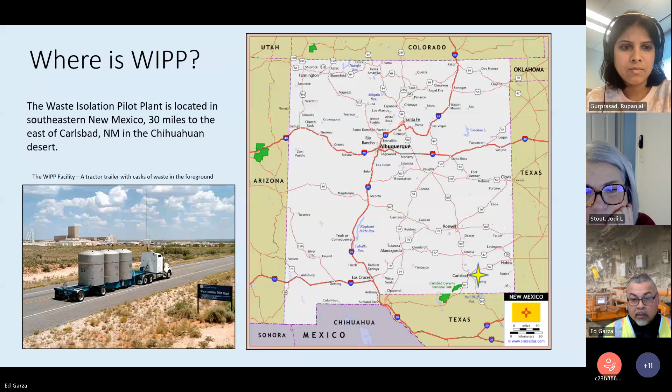So what is WIPP? That's the question we get quite often. We are the nation's deep geological repository for defense-related transuranic waste. The facility is owned by the Department of Energy and operated by a contractor that we contract to run the facility for us. We currently have started a new contract with a company called the Salado Isolation Mining Contractors, abbreviated SIMCO. You might hear me say the word SIMCO on occasion here as we're talking. Again, it's owned by the DOE but operated by a contractor for the DOE.

Transuranic waste, defense-related transuranic waste, is the byproduct of the production of our nuclear weapons cache in the United States. Many people don't know, but since 1945 and the Manhattan Project, the United States has built in the neighborhood of 32,000 nuclear warheads. And the complex required to do that is very large, dispersed throughout the United States.

In the process of making nuclear weapons, everything in the production process at some point has the opportunity to become contaminated with plutonium and uranium, which are radioactive components, radioactive isotopes. For that reason, if you make waste that has some element of plutonium or uranium, or any of its decay byproducts, you just can't put that into a regular landfill. So it has to go to a special repository that wouldn't risk contaminating the environment, and that's what WIPP is. We are that repository.

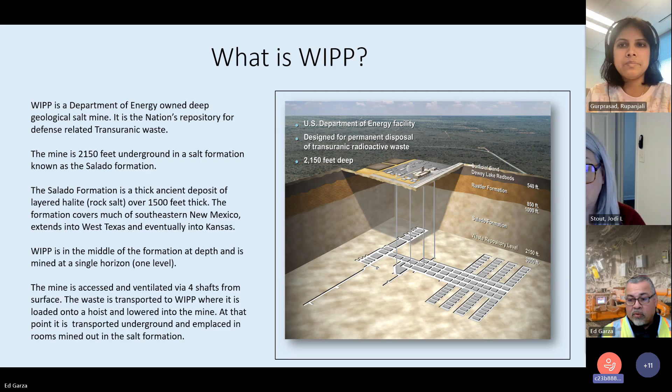Once we get it here, we take it underground. It goes into the different rooms, and then we just do it over and over again. In order to do this operation, we have to operate the mine. So I'll go to our next slide here.

One of the questions I often get about WIPP is, why would we do this operation in a salt mine? Why halite, or rock salt? Rock salt is known as halite in the mining community, and it has many favorable characteristics for this type of activity. Salt is essentially a plastic medium.

What that means is when you drill into salt, let's say I drill a hole into rock salt, the forces felt by that rock salt will cause the salt to flow into that hole. So if we put transuranic waste into a room mined into rock salt, that salt will over time slowly fill in that void space and encapsulate that waste for perpetuity. That's the reason we're doing an operation like this in a salt mine.

It was actually a study done by the National Academy of Sciences back in the early 50s to decide what we would do with this issue of transuranic waste.

So you see a picture there, an actual picture of rock salt. It's interesting — rock salt weighs about 135 pounds per cubic foot. A cubic foot is about this dimension, and that's going to weigh 135 pounds. So you can imagine there are tons and tons of this that we have to deal with when we're doing this operation.

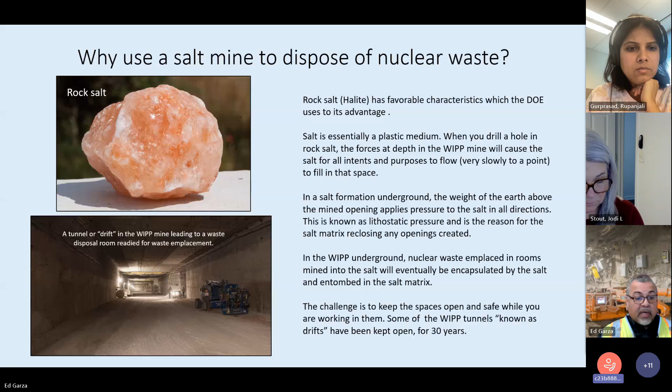The trick for us is that we have to allow that to occur in the rooms where we place the waste, but the drifts or access tunnels we use to get to those rooms, we have to keep open without them encapsulating us while we do that activity. So that is really our challenge. The WIPP facility has some openings, tunnels, which we call a drift, that have been kept open now for over 30 years, which is really a challenge in the mining world.

Every opening in the mine is continually experiencing forces from this lithostatic pressure. These forces act upon the bedded salt layers and can cause cracks and spalling on the rock exposed in the opening. Those rocks can come apart and fall into the opening, some of which are 25 feet tall. And as I said, rock salt weighs 135 pounds per cubic foot, so that obviously becomes a hazard to the workers in these drifts or tunnels doing this operation.

The force is equal to about 1 pound per square inch for every foot of earth above that opening. Since we're at 2,150 feet underground, the forces felt on all the openings at the WIPP site are equal to 2,150 pounds per square inch. So that is quite a bit of force.

If we don't mitigate that force trying to push the roof and walls inward, the rock could slough off, break apart, come down, and strike or even bury miners working in our underground. That could lead to accidents, serious injuries, or even fatalities.

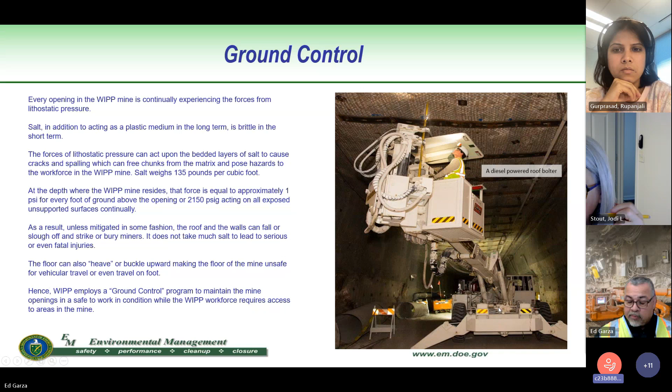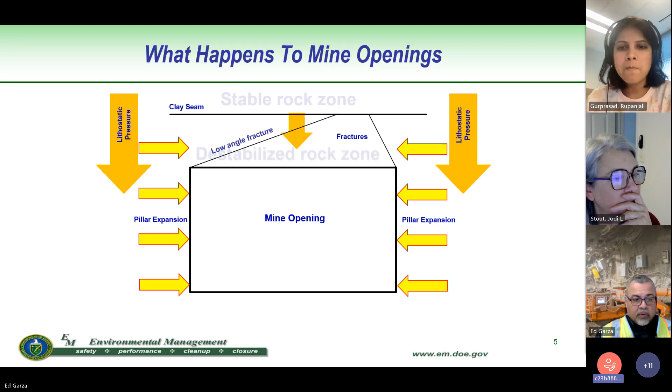Now, I'll talk to you a little bit about a phenomenon that we call low angle fracture. So in this graphic here, you can see that there are forces that when they are manifested on the opening, they're going to cause a phenomenon that's called low angle fracture.

Now, when I tour people in our mine, I ask them to take a guess about where the forces inside of this opening are manifested the most. Most of them will say in the middle of the roof. But actually, it's where the horizontal and the vertical of the roof and the walls meet. That's where the forces tend to manifest themselves the most.

And what will happen is you'll start to see microfractures that start to propagate from those corners, and then they will start moving upwards, or if they're coming from the bottom, they'll move downwards, and they will continue to move like that and coalesce into big, gigantic fractures. So eventually they're one fracture, and they'll propagate until something stops them.

Usually, in our mine, it's the clay seam layer that's above the opening in that destabilized rock zone, or they could actually run into each other and stop each other. But as you can see from the graphic, the result of that is that now there is a portion of that destabilized rock zone matrix which has been freed from the matrix, and it can fall into the underground. And this can be literally tons, even thousands of tons of material.

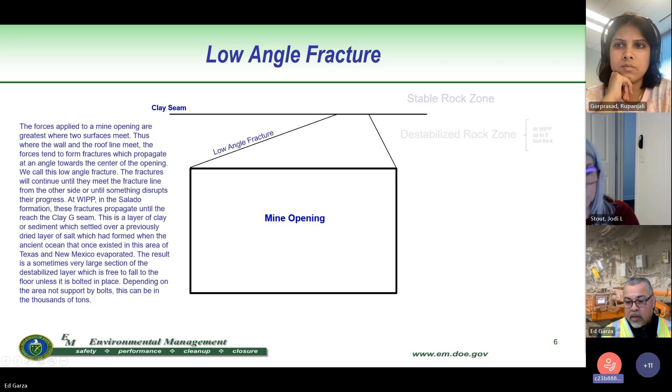We also use chain link mesh. Now, it's not the standard chain link you'd see dividing someone's yard from the street - this is very heavy-duty stuff that can hold up to 3,500 pounds per square foot.

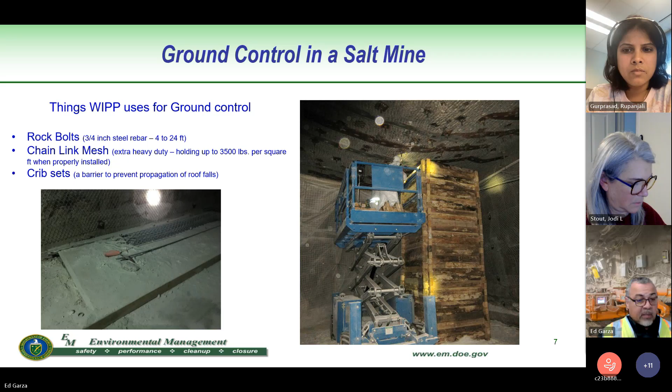Sometimes we also use things called crib sets. Crib sets are probably what you've traditionally seen in movies about mines - timbers stacked up from the floor of the opening all the way to the ceiling, just there to hold up the ceiling. It also has the added advantage of preventing roof falls that begin in the ceiling from propagating past where you put the crib set. So those are just some of the components we use for ground control.

Now, the main component we use is a rock bolt, and here's how it works. In this picture, you can see past that chain link mesh into the destabilized rock zone. This is an area that actually fell, and you can see the layers of salt that make up that destabilized rock zone - we call them laminates. In the middle of that buckled laminate, that roof you see there, you can actually see an old bolt that had at one time held that laminate together.

So that's what rock bolts do - we pin the laminations in the destabilized rock zone together by adding that bolt. Usually we use shorter bolts for that, called mechanical bolts, which make that destabilized rock layer stay together and be more coherent. However, sometimes we have to anchor the entire piece of halite freed by the low-angle fracture phenomenon, and we use longer bolts in that case. Those longer bolts go all the way through the destabilized rock zone into the stable rock zone - it's kind of like nailing drywall to a stud.

Now, like I said earlier, at the end of those bolts they're threaded. So we take a metal plate that has a hole in the center, put the bolt through that plate, then take a nut and torque it up against the plate and the ceiling - that's what pins that bolt onto the ceiling.

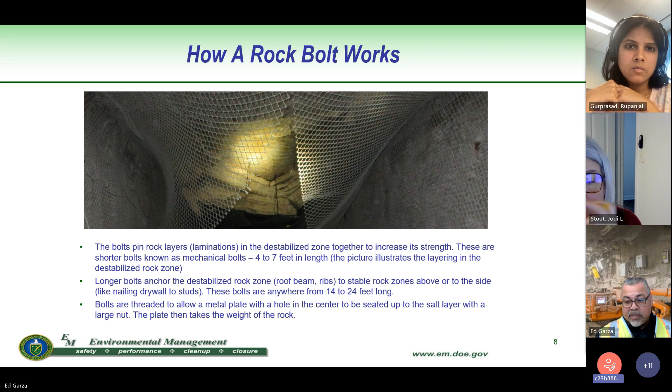I have a graphical representation that shows this a little better. Here you have the destabilized rock zone, and the stable rock zone above that. What we do is drill holes through the destabilized rock zone into the stable rock zone, about 20 feet deep. We push a resin packet up into that hole - it has two components, so it's not set yet, just little packets pushed up in there. Then we take the bolt, and the bolting machine pushes the bolt up into that same hole, piercing that resin packet. Then we spin it with the bolting machine, which mixes the two resins, and they set in about 30 seconds.

Now, basically, it becomes part of the stable rock zone matrix, and it's very strong. It will hold that bolt in that resin packet and an additional 65,000 pounds. After we have the bolt into the resin and the resin packet is set, then we'll take the plate, which has a hole in it, put it around the bolt, and the nut will push the plate up onto the ceiling. Now what we have done is we have captured the weight of that area of rock that has been freed, and it's being held by the resin packet and the bolt in the stable rock zone.

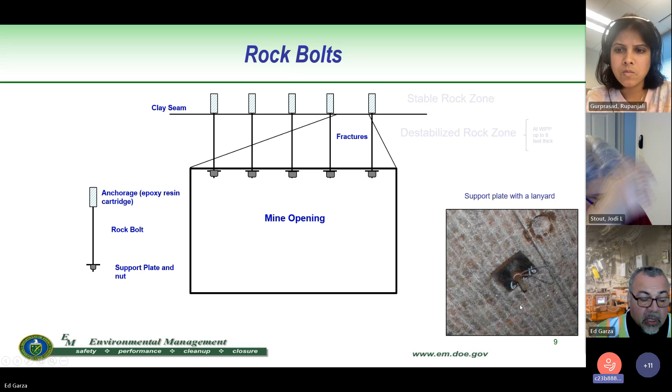So you see on the right-hand side of this graphic a picture showing one of the completed bolt assemblies. You can see the plate has been threaded up against the rock surface by the nut, and you can see the end of the bolt sticking out from the hole in the plate, and the portion threaded through by the nut. We also put a lanyard on that nut so that we can capture any bolts that break.

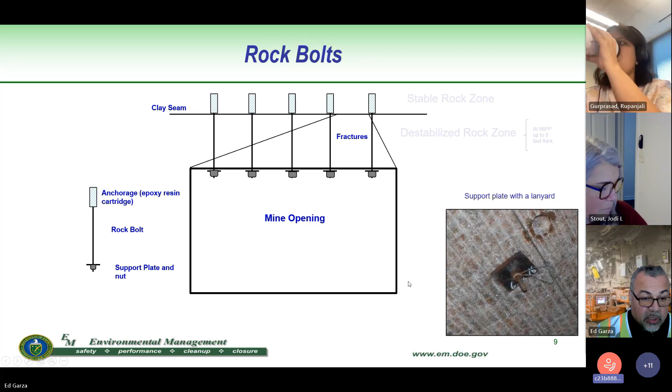Now we have a bunch of these bolts in our underground. This is the main rock support system that we use to prevent rocks from falling on us. The long bolts go through the destabilized rock zone, and they have the strength to hold up 65,000 pounds of weight. We only take credit for 45,000 pounds to give ourselves a little margin.

Now, the question I get often is, how do you know how many bolts to put in the rock in order to stabilize the freed rock from the low angle fracture phenomenon? Well, number one, we have a lot of experience. We've been doing this for 30 years now. In the picture you see there's obviously a pattern of bolts that we put in there. Over the years, we've learned that if we put 7 bolts in a room where we place waste all the way from one wall to the next, and then 5 feet later put another row of those bolts, that will be enough bolts to hold up any rock that destabilizes and wants to fall. This is something we've learned over the years.

But if you have a low angle fracture phenomenon occurring, you can drill up into that destabilized rock, and then put a scratching tool that will go up and find where the rock is separating from the matrix. Now you know how thick the rock is, and if you know the area being impacted that's starting to come down, which you can do with sounding tools or sonic tools, you'll be able to tell just how big an area of free rock you have. Since you know that halite weighs 135 pounds per cubic foot, now you know how much steel you need in order to hold up that piece of freed rock.

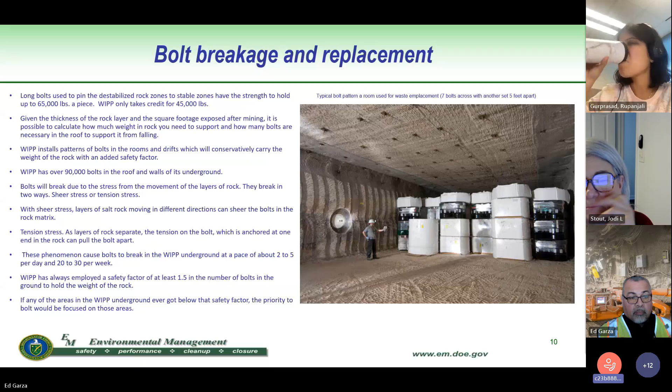Now, the bolts will fail, they will break from the forces they are feeling in the underground. There are two ways for our bolts to break. They can either be sheared by shear stress, caused by the laminate layers you saw in that picture earlier, moving against each other, sliding against each other. They'll actually slide enough that they will snap the bolt somewhere along its length, right in half, or along the length somewhere. That's why we have the lanyard, to capture the lower portion of the bolt that was broken by that shear. The rock can also move downward.

It can start to sag, and as it sags, it will actually move around the bolt and the plate, and it appears as if it's sucking the bolt and the plate up into the rock matrix. As it does that, it's stretching the bolt, and at some point you reach breaking strength for those bolts, and they snap from tension. So either shear stress or tension stress will break our bolts.

On average, in our underground, we lose 2 to 5 bolts to those stresses every day, and about 20 to 30 of those bolts every week. They must be replaced, because if you've lost a bolt that's been holding up some portion of the weight of suspended rock and it breaks, the bolts around it have to take up those forces, so they'll be weakened or fail at a quicker pace than before. So every bolt that breaks, we have to replace it. That's why the bolting operation is so important and so intense in our underground.

In any of the areas in our underground, we measure the safety factor by the number of bolts that we have intact, that are not broken, knowing the weight of the rock that we know is free, and we maintain a 1.5 safety factor. If we ever go below that in any area of the mine, we will add bolts to make sure we maintain it at that safety factor, so that we have some margin.

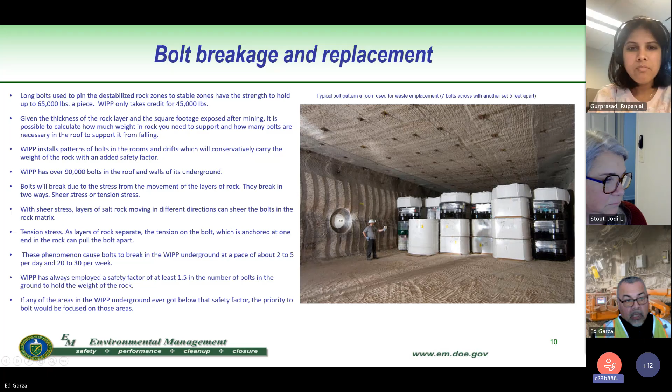So the walls are the posts, and the roof is the beam. If you have lithostatic pressure acting on the walls at all times, it's going to try and push the walls inward into that opening. And as you can see, the walls will actually start to lean. If you come into my underground and come to some of the older drifts, you can absolutely see that the walls appear to be leaning inward. And as they do that, they're compressing the beam that they are holding up.

The problem with that is that, number one, it's deforming the rock, and in some cases it will start to rubbleize. It will also impact the bolts, kind of defeating their purpose if it starts to rubbleize around them. So we have other strategies that we use, and when we really start to see deformed rock layers, we try to hold those up. We actually put slings in some cases and create a basket with wire slings that will hold that belly in place. There are some places in our underground where this belly has deformed by as much as 10 feet.

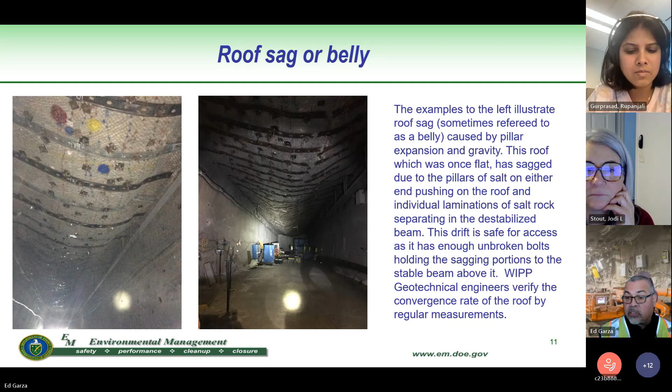I would take my mother down there to these areas, but when they become dangerous, that's when we would prohibit them and get people out of those areas. We have an entire geotechnical group, engineers, whose job is to do this every day in every area of the mine, all 8 miles worth of drifts we have underground. They keep very close eyes and monitor the movement in all those areas and inform our underground operators what they should be doing to keep them safe.

So I did mention earlier the chain link mesh. That is for loose, unconsolidated rock that gets crumbled or rubbleized as the rock is moving and trying to fall down. They tend to rubbleize along the edges where the horizontal meets the vertical, and this very thick chain link just captures it. Once in a while, we have to open it up and empty out an area of chain link that's collecting lots of loose and unconsolidated rock.

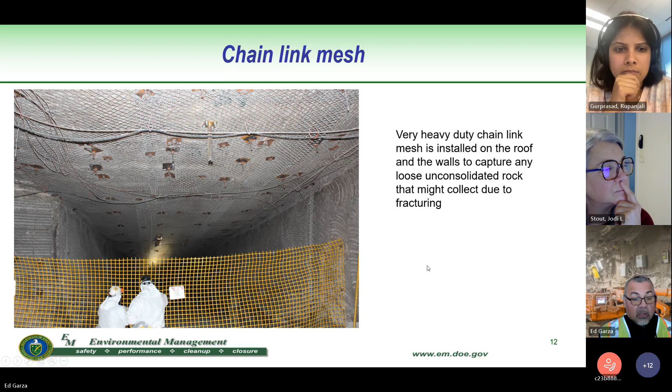Almost done here. This is a picture of one of the bolting machines that we have. Interesting units—you can see there's a boom that comes off of this machine. These are diesel powered, although we have some hybrid bolters that can run off of electricity as well. There's a cab, and an operator, a miner, will be in this cab, and the boom can extend outward and upward, and this is where he'll apply the drill steel and drill the holes into the back, and then push the bolts up through the holes he's created, with the resin packets and all of that.

These things are not nimble, okay? We have 6 of these units, and they're all employed pretty much at all times, so we have to tram them to any area of the mine where we need to put bolts in, where we're having bolt failure, and then we have to put the outriggers out. We have to get set up. There's a whole crew that does this, 6 crews as a matter of fact, working on each of the individual miners. And then they have a considerable amount of maintenance we have to maintain to keep them operational. So sometimes we don't have all 6 miners employed because either they're in their PM cycle or we're doing some sort of repair to them.

These units have hydraulics that apply the force so we can drill through the rock, and there are in the neighborhood of 400 to 600 hoses on each one of these machines that have to deliver the hydraulic fluid in the manner we need. So if you have that many hoses, you're going to develop leaks over time, and we have to replace those hoses when that occurs. This is a very intense, very high activity thing that we do, because we have to keep bolters running at all times to maintain the mine in a safe condition.

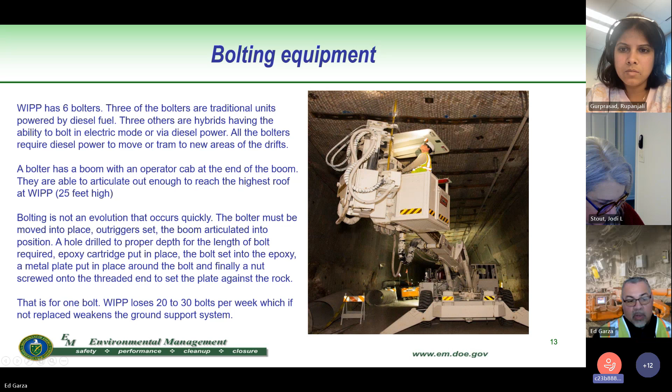In the time I've had the privilege to work here at the WIPP site, we have experienced 6 rock falls. All of them we saw coming before they happened. As a matter of fact, the closest we predicted that a rock fall would occur, and then it actually did occur, was 21 days. Usually when we predict rock falls, they happen anywhere in the neighborhood of a month to several months. So we make sure we have plenty of margin if there's an area of the underground that we cannot control. So that is it—those are all of my slides. I would welcome any questions that anybody would have about ground control.